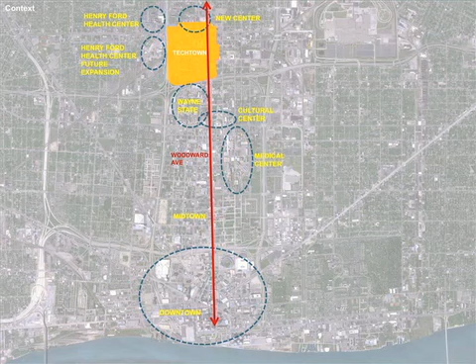So you have a number of buildings—some of the big car companies actually began in some of these buildings. Tech One is a famous building by Albert Kahn. You have various companies now in these buildings, energy companies, technology companies, but everything is very inward focused.

We were asked to develop an idea for the neighborhood that would lead to a master plan. Our idea was actually not to do a master plan, but to develop a strategy and a series of catalytic projects—to draw out of these buildings and out of these inward-focused environments places where people could meet and engage with each other and become aware of what each other were doing.

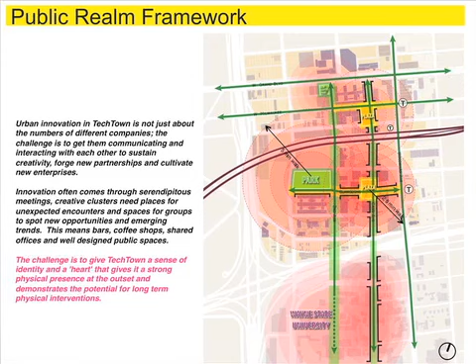We looked at the connections, the surrounding uses and some of the sites, and developed a series of public spaces that could become an organizing idea for this district—how to draw people out of the buildings and get them to engage with each other and meet, what we call promoting creative collisions, allowing for the unexpected and the spontaneous.

So we looked at a couple of key buildings and parking lots and developed a strategy to draw these buildings into these spaces and to create a very dynamic environment very quickly and cheaply.

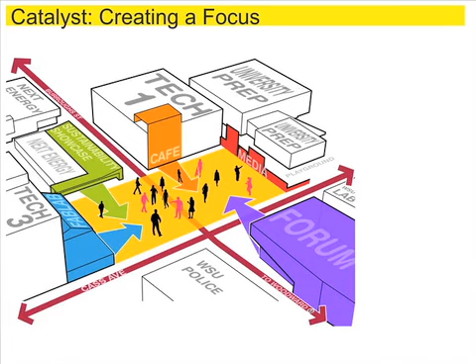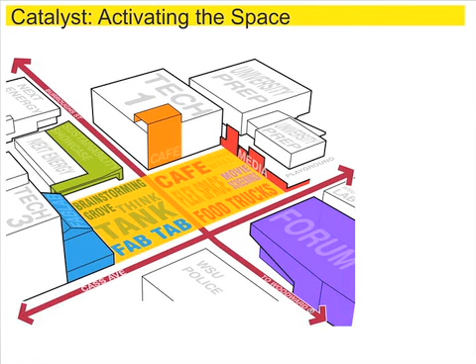I'll describe some of the uses in a moment. But as we developed the idea, the idea was to create a place that would allow people to come across it, to engage with it, to bring what they're doing in their various companies to the space. And we gave it a very strong identity that would be visible throughout the district.

This allowed for an evolution of uses that can happen over time, over different times of day and different events as they're programmed. We described a scenario of different people through the district and how they would experience the place. The idea is that students, company people, people in the medical industry, people in very small startups would all have a place to go.

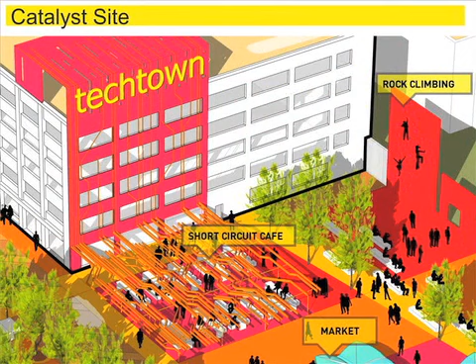Using paint and temporary pavilions and shade structures, begin to draw out people from their buildings. Established a cafe, a climbing wall next to a school. It becomes a meeting place where you can actually work and just stop by for a drink.

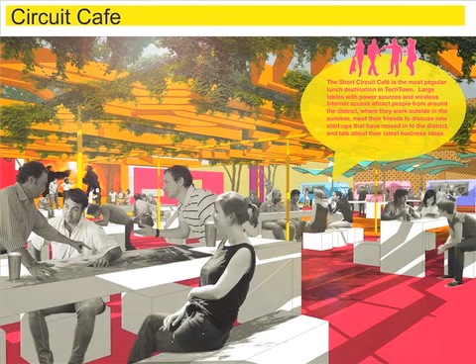Found local companies that have food trucks and set up a place where they could come on weekends and different times of the day to set up temporary restaurants, different kinds of meeting spaces, and what we called a fab lab, a fabrication lab, where high technology equipment would be available and then might extend out into the space where people would assemble prototypes and models and share the technology.

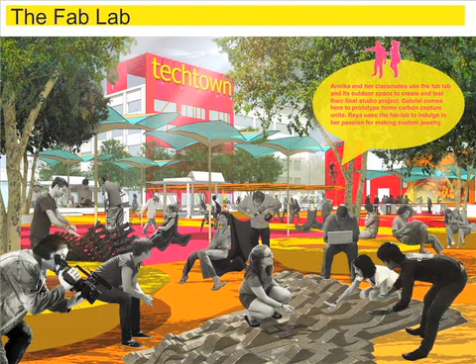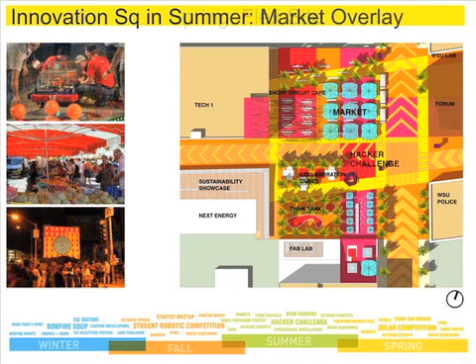Looked at different times of the year. In springtime, maybe a solar competition, the summer market times, winter skating, bonfires. It became really about the 24/7 environment, not just a place of work, but a place where people could live and do things that are between their world of research. Livability, the idea of social sustainability, was a critical idea.

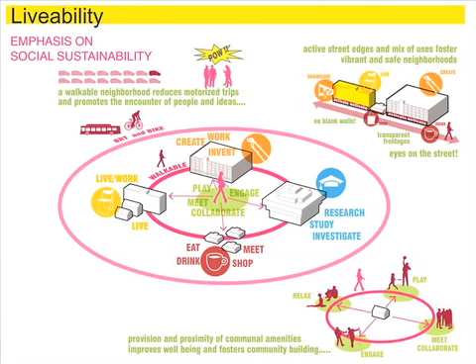As well as the use of technology, we thought of the district as a digital mirror. How could you get information? How could you find out what was happening in the area? How could you find out how much energy was being consumed or produced? Many different aspects of the district could be made available through this kind of technology.

So we're actually just getting started on that project, the real project now, working with a client, just having a kickoff meeting in November.

The exact opposite, I guess, of that is this place, which is the Dead Sea in Jordan. We were invited by an agency of the government to develop a strategic plan for the Jordanian side of the Dead Sea. Immensely complicated place for us. We'd never been there before. The Dead Sea—everything you know about water and aquatic life and ecology—at the Dead Sea, it's the exact opposite.

There is no life, there's no relationship between the land and the water. There's no exchange. The water is very dense, and in fact, you float on it. You can't even stand in it, it's so salty. And it's a place of mind-boggling history, recorded history, of all these different kinds of people that have lived here.

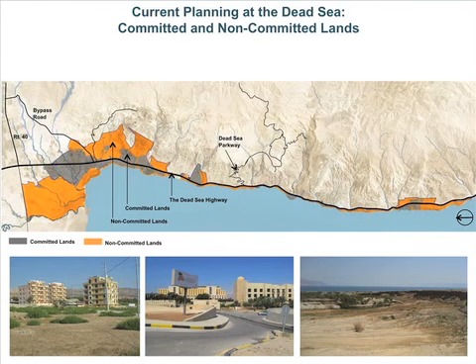A number of years ago, after being alarmed at all the land that was sold off, they decided to put a huge area of the escarpment and the hills into a natural reserve, but all that was left of the edge of the Dead Sea were these tiny little fragments of public land. And Sweimeh completely turned its back to the sea.

So you had no sense of relationship to the sea. And that red line that comes along the edge is a highway built by the Japanese government as a gift, and that is the sort of connector that ties it all together.

So we spent a lot of time mapping the area, understanding it, talking to locals, meeting with villagers, meeting with government officials, and began to develop a strategy of how to think about a balanced approach to development, one that really began to establish a public realm.

We began by analyzing the place, looking at its natural features, the wadis, or the whole drainage pattern, which became a major driver of our ideas. Looking at...

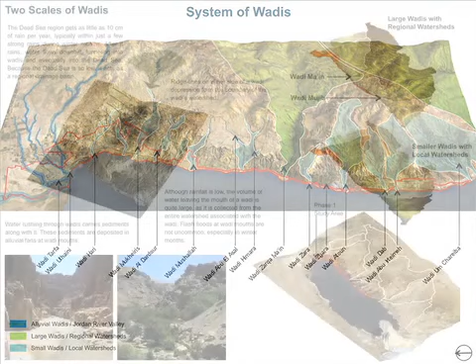these patterns which can be very exotic and dramatic, but also very dangerous when storms come, or flows can really tear down a concrete building. So you have to be careful.

Here you see one of the most dramatic ones, carved out over centuries by the flow of water. The wadis move around. In fact, that line on the left is the path of the Jordan River just over about 50 years. It's changed dramatically.

So there was a big argument with the client to set back development from this. The client is very eager to sell land, make money for the government. It's not a rich country, they have no oil, no real resources, and so tourism and development is very important.

But we convinced them to use the wadis as a resource and to work with them as a place that contributes to the natural wonder.

The sea is actually dropping about 1 meter a year. The Jordan River is completely dried up, and there's a plan actually to build a canal from the Red Sea to help replenish this. It's obviously a very complicated project, but we had to work with a coastline that would be evolving over time.

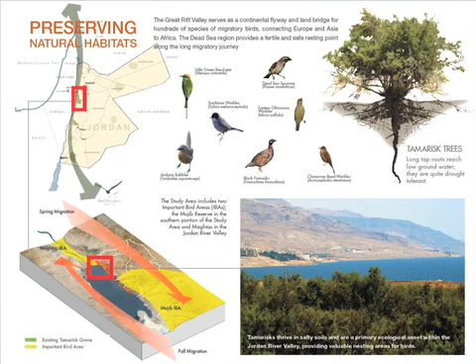Part of our work was to look at the natural habitats and understand the place. So a key aspect of the work was the economics and the financial aspect.

They were going to use the land and evolution and development of the Dead Sea area to improve the infrastructure for the community and the nation.

So how do you take these separate resorts, which are all operating independently? People come there, they stay for 3 days, and they leave and do nothing else. How can you think of them as value chains that add up to something more?

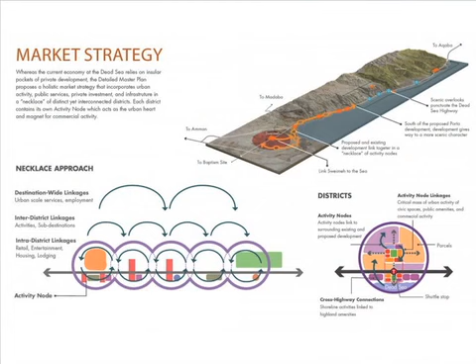Our idea was to develop a series of nodes and focal points that would be mixed use and completely open, so that people who lived there, who were just visiting or came to a resort, would have many different things to do. We used this strategy to engage with the sea itself.

So connecting the city, the town of Sweimeh, back to the sea, back to a public realm, and developing in a very strategic way relationships to the water, the hills, and the movement system.

A very interesting aspect at the northern edge was the tamarisk, which is a very interesting part of the ecology of the region and the bird flyway. There was a lot of temptation by the client to just wipe this out and develop the land, but it's really the best part of the area.

We convinced them to save it and to develop really an ecological park with a number of public beaches at the edge, and to create a whole new front to Sweimeh, this Corniche area I'll show you, and between it all flow the wadis from the hills to the water.

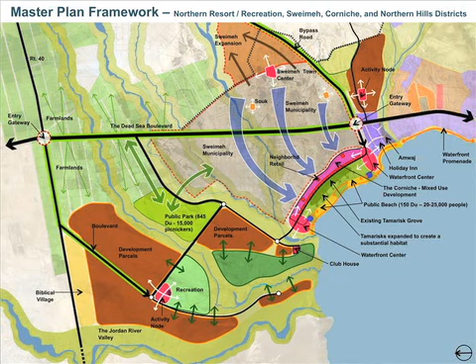And so Sweimeh finally has a face on the sea, and we could develop a series of public realms that would be fronted onto by a much smaller and fine-grained pattern of development, so that the development at the Dead Sea wouldn't just be these mega resorts by international companies like Hyatt, but would actually be small investors who would develop this over time.

And we then connected that back into the town, made every connection we could, and I'll talk a bit about the town in a moment.

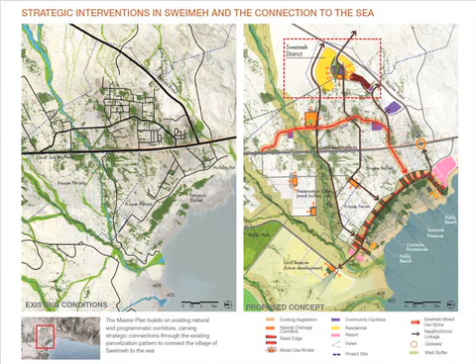So here was the new Corniche with the pattern of development. It's just one scenario of many small hotels, retail, commercial, and these nodes, these mixed-use nodes at either end. What the edge might be and some of the ecological strategies in terms of the building orientation and movement.

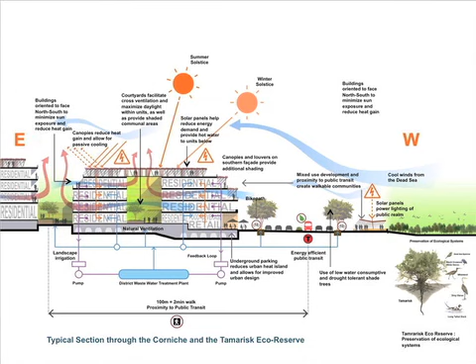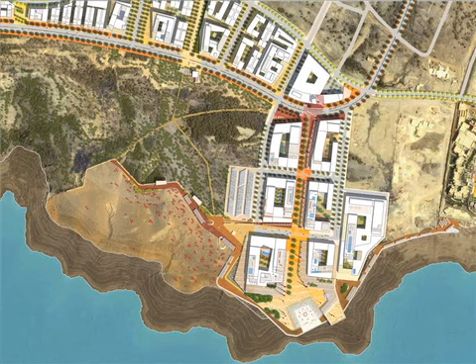So this is how Sweimeh might ultimately relate to the sea. You have the Tamarisk ecological zone, and you have this great Corniche of small-scale buildings, mixed-use, cafes, restaurants, hotels, residential, anything that could be developed here, all overlooking the area. And then a series of more intense development at these very strategic places where the visitor center is set up at the end of the street, and that's the blue dot.

And from that, you get an amazing orientation of the whole district in relation to the sunset, and an utter transformation from these privatized worlds to this new public realm.

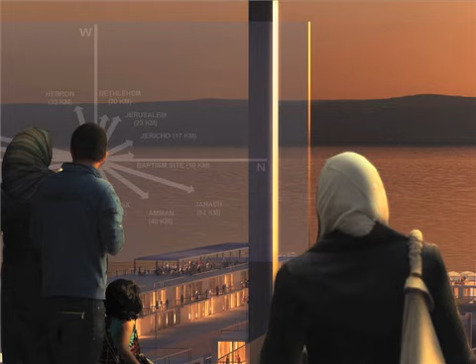And you recognize these places that are just a few kilometers away. Jerusalem, just 20 kilometers. And when we were doing this, Jericho had its 5,000th anniversary as a city. So we were thinking, well, Boston's what, about 300?

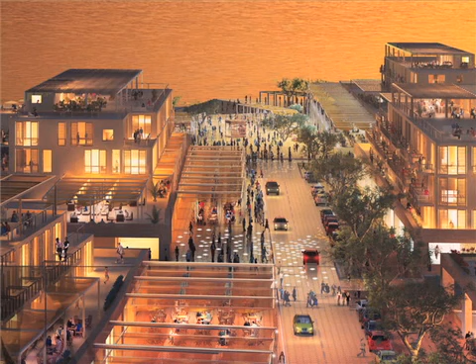And so we developed a series of guidelines and controls that would help this much more dynamic urbanism to evolve. And then when you pull back, you see that new face to the sea for Sweimeh, with the resorts evolving in the distance.

Sweimeh itself was very, very difficult to work in, because the government controlled almost no land. And furthermore, they'd made a huge mistake in selling land in wadis to naive owners who thought they could build houses there, which you really can't—it's very dangerous. So part of this was actually a strategy for land swaps.

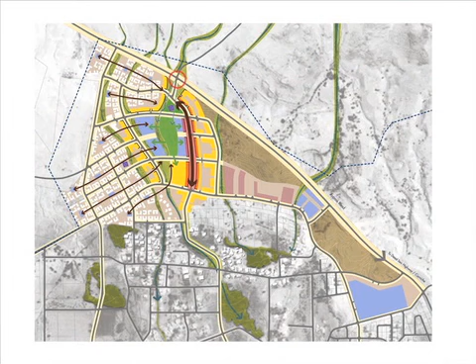But there was one place in that yellow area up on the top left, where at a major entry to the town, we could make a whole new settlement in response to the lack of community facilities, affordable housing, and public space. So we preserved these small wadis, integrated them into the new district, connected up every street we could, and made a new entry to the town in this area.

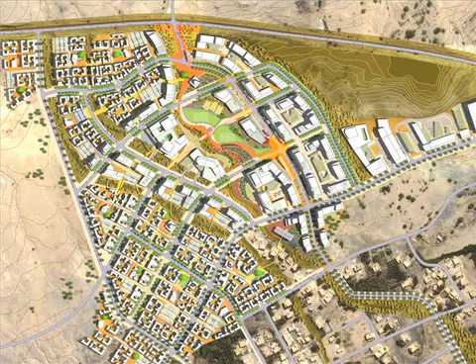We looked at different building types for family clusters, mosques, small schools, and other kinds of facilities, as well as a new main street commercial spine, which would ultimately lead to the Corniche and the Dead Sea itself.

And so this became the new entry area to Sweimeh, with a community park and the main street, with the schools facing onto those areas.

And a key strategy had to do with how we were dealing with water and sewage treatment. Part of selling the land for development allowed the government to build a sewage treatment plant, which would allow reuse of water for irrigation, toilets, and things like that, so that the cesspool approach—which was poisoning the wells and the water table, causing a lot of flies in the area, and unhealthy environments—could be completely transformed. And this, in fact, is now happening in the implementation.

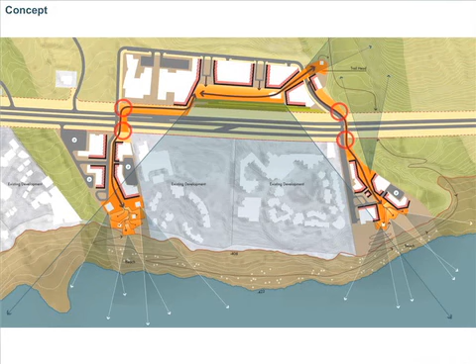You see a big hotel and conference center that's been built next to the sea. Our idea was to create this sort of mixed-use area up on the hill, and then to make these connections down the hillsides towards the water with a series of public realms and smaller development parcels that would strategically frame views and create a whole new kind of relationship to the water and the horizon.

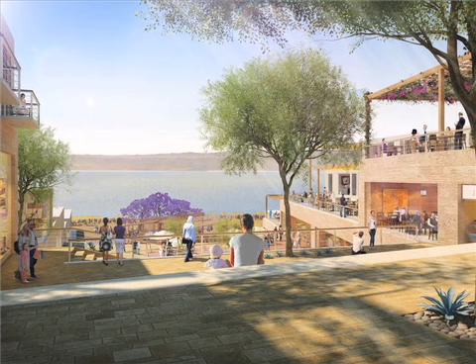So you can see us working with the wadis, protecting them, setting back. And so instead of this private world facing the sea, you had a whole new public realm.

This project is a competition we recently did, and it's the exact same size as the Dead Sea project, 40 square kilometers. Martin and a whole lot of people worked on that. This one, we had a lot of fun. It was a real experiment for us.

It's actually part of a previous competition that we won, for an area called the National Creative Cluster, which is a strategy by the government to advance creative industries in China. We were then asked by the local government to look at a site much bigger, and I'll talk about that. The site is in the eastern part of Beijing.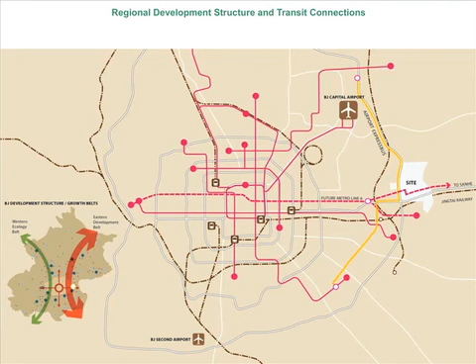It occupies quite a strategic location, the same size as Manhattan, which is very intimidating. It's on a major growth path of the city, where a significant transit line will be extended to the area. It sits in an agricultural zone, but it's rapidly developing with housing, towers, some really poorly planned environments, and the agriculture is slowly getting destroyed.

Here you see that pattern of development. One of the interesting things about this area is there's been a huge investment in art and artist communities, and that was actually a key triggering idea by the government to evolve this as a creative industries area. They were also very interested in agriculture and farming, how that could become part of the development.

They left it up to us to think of strategies to make proposals. Here you see some of the artist communities being developed, artist studios, galleries, incredible investment going on in Chinese culture and cultural development in this area.

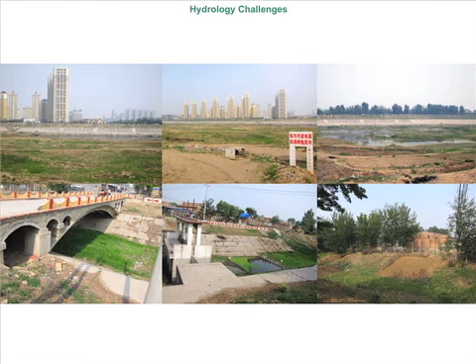Lots of water issues, landscape, ecology issues. There you see some of the development, not on our site but near it, extending out in a sort of tower sprawl. And you see the pattern of agriculture that is slowly being destroyed. Part of our challenge was how to address this and develop an urbanism that keeps things more in balance.

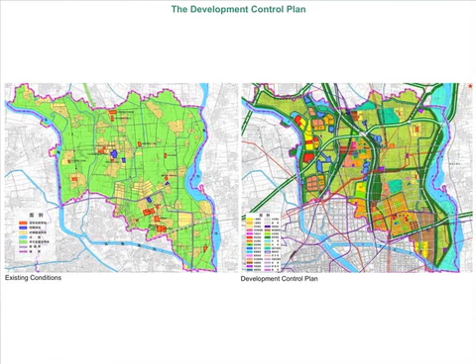There's a government control plan, there always is, and their idea was to consolidate development, but it's so huge, and ultimately we know it would just sprawl further into the landscape. We had to work with that, but we were free to make some significant changes in strategy.

So here you have the Chinese national strategy to move away from a purely production and factory economy to a creative economy, from made in China to designed in China. Sort of the opposite of the Apple philosophy, or to move away from that if they could. Part of our work was to invent program ideas for how this area could evolve.

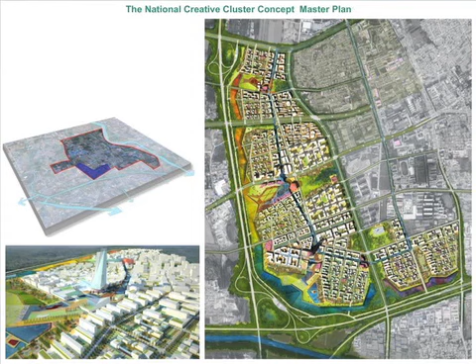This is part of that competition we won, just one corner of the site, but I'll look at the bigger picture instead. Our idea was to develop a framework that would allow agriculture and farming to coexist with urbanization, and to develop creative clusters as a series of settlements framing this farm landscape, working within a very complex and diverse ecological framework.

One of the things we had to do was keep the road pattern proposed by the government in their control plan, which was a huge frustration because many of the roads didn't exist yet but were committed and set. We also worked within the existing pattern of development, trying to integrate as much of what was there as possible, looking for a balanced approach of urbanization, agriculture and farming.

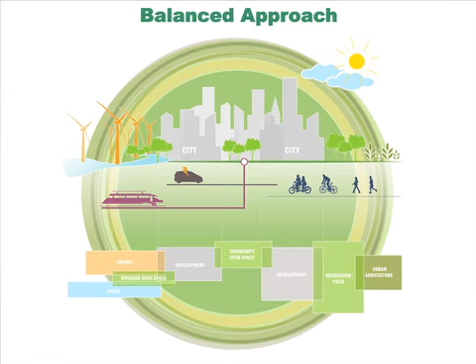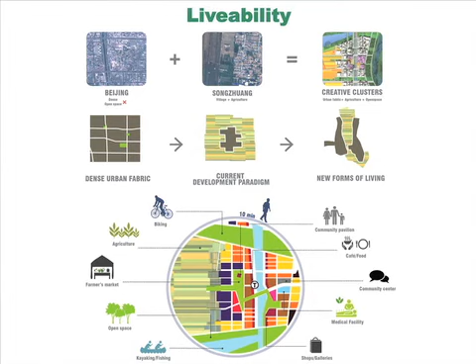Thinking about qualities of life, what makes a livable environment in Chinese culture, in evolving 21st century economies, looking at a diversity of development types, from existing villages to residential areas to creative industries, live-work, office, and all through a range of agricultural and farming communities.

The site hydrology was a key driver. It's an arid region, but there's a whole series of canals and waterways that we wanted to work with and had to work with in terms of the ecology of the district. Integrating the canals and understanding how stormwater management would work was a critical driver of the form of the major landscape systems of the area.

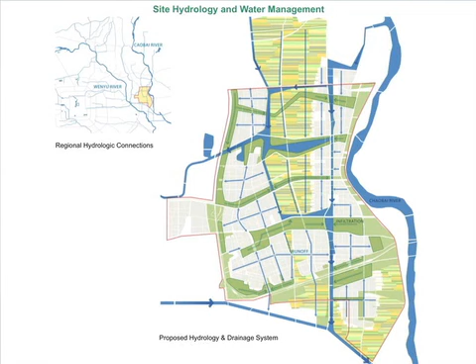So you can see how we started to entwine an agricultural pattern, a pattern of canals and waterways, and greenway systems, and existing highways—that's what's slicing through there—really working with the existing place and overlaying this whole big new idea for the urban development of the area.

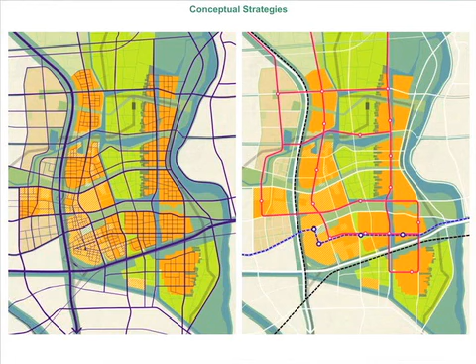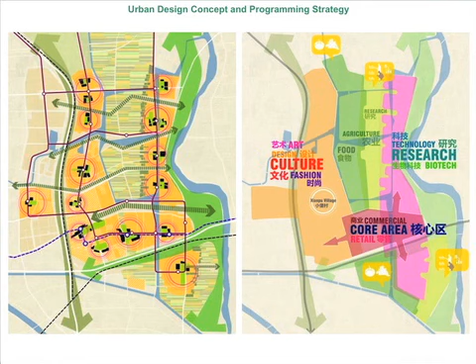The road pattern, extending and working with what exists, then creating new, more fine-grained patterns, connecting it up with transit, making a series of multiple centers and districts. We started thinking about program and the kinds of industries and places that might emerge in this district, from design to agricultural experiments, research, and alternative medicine, with the commercial core at the bottom of the U, where the major transit extension from the center of Beijing would occur. You see this mixed-up land use pattern of clusters emerging, and how the ultimate framework works.

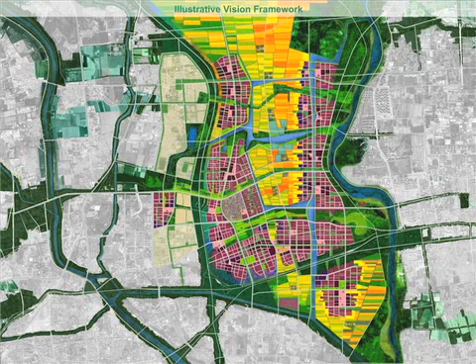One of the ideas that triggered some of this thinking was a lecture Richard Sennett gave at Harvard a few months before we started, where he spoke about borderlands and boundaries, how he liked the idea of a borderland where there's a lot of ambiguity—not one place or another with a fixed line. This idea of agriculture and urbanization being entwined with each other was inspired by that.

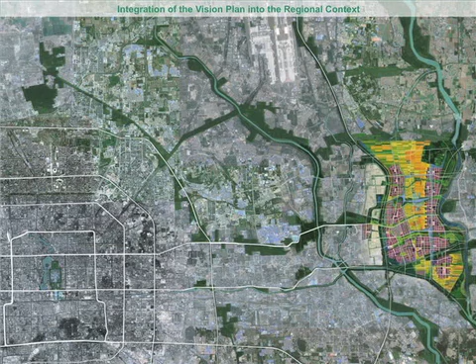So when you look at this, here it is in the context of Beijing, and that's the Forbidden City over there. There's our project, and there's the Olympic site we worked on a few years ago, which we thought was huge then—so this is just truly monumental. I don't think we've ever developed such a large area in our office at this scale.

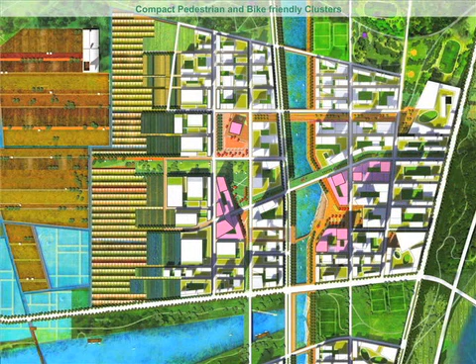Looking at the design principles of these mixed-use clusters and the integration with nature, the organization of urban form and diversity—how to think of this multi-centered, highly connected environment and how it relates to the farmland, which I'll talk about in a moment. We worked with the existing canal, making spines and public spaces served by transit, with social centers in pink—community facilities, schools, and public spaces—all embraced by these mixed-use clusters of development, which I'll show more in a moment.

So multiple systems working here: the urban districts, the greenways of recreation, sports and larger park systems, the agriculture, the canal system, all integrated to create this new urban pattern.

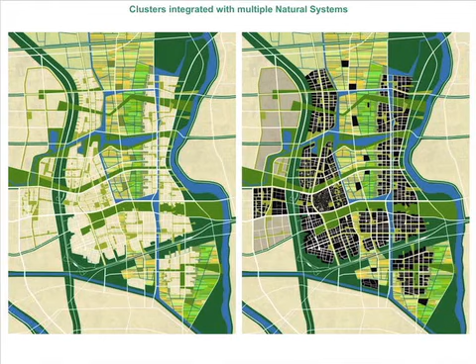The transit was critical to give people choice—whether you walk within your neighborhood, where you have all these different things going on, or ride your bike or take transit, as alternatives to cars.

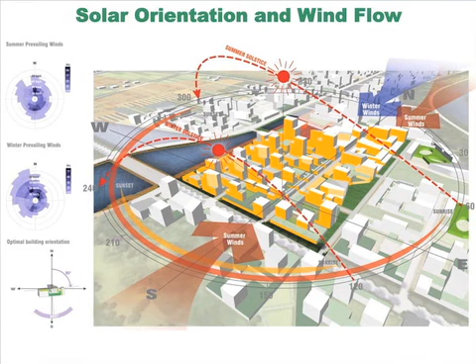So how do we program these places in a flexible way? It's really around the public realm and the big organizing ideas, looking at how you develop these blocks at the appropriate size and orientation. We looked at different building types, which grew out of Chinese village settlement patterns, and how to reinterpret those into 21st century mixed-use districts.

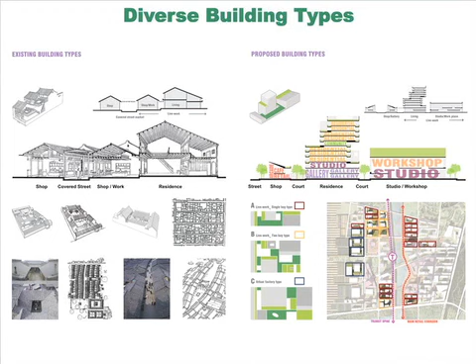How to think about agriculture, from the current scenario of farmland or importing products to consuming them—could you live in a more integrated setting where urban agriculture is part of the scenario?

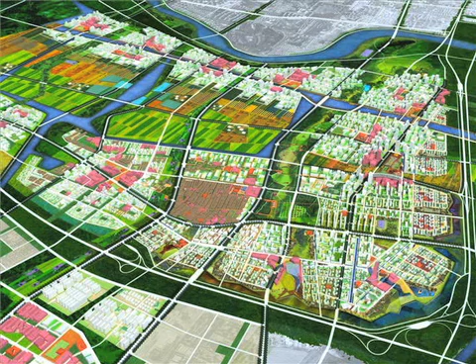The pattern evolved, and you see some of the major art community which exists in some of the villages that we incorporated into this larger pattern, all embraced and entwined in the agricultural production economy. We tried to think of different kinds of economic drivers within this agricultural industry, from production and local markets to culinary arts, to research and alternative medicine, and all sorts of experiments in agriculture practices. How could these evolve in this kind of borderland idea that is entwined with urban development?

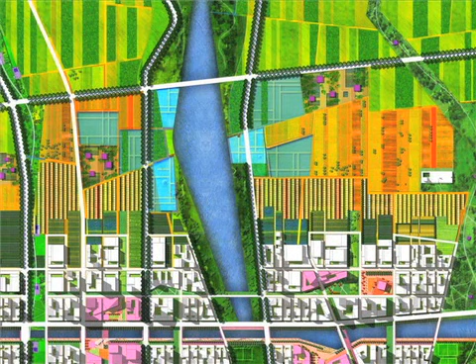So here you see scenarios of different patterns of agriculture as they relate to the urban areas—experiment zones—and working with our ecologists on whole ecosystems, moving from production to consumption to decomposition, in a kind of integrated circuit.

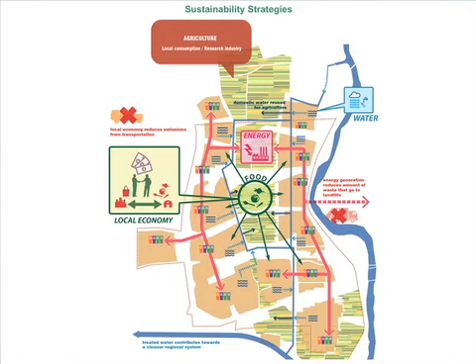And that is this sort of world of living with food production and living with energy production in an integrated way. So the overall plan connects to regional park systems, agriculture systems, with an intelligent network where you can find out what's going on wherever you are.

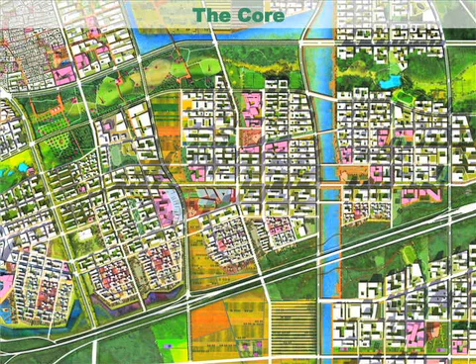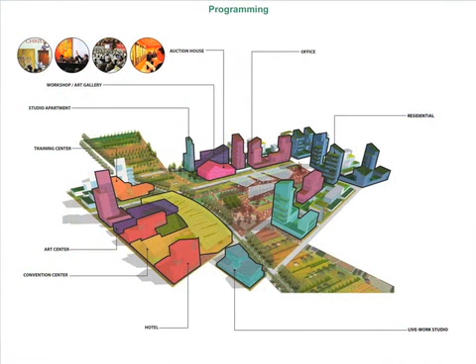Then looking at the core, which is the major transit hub of the area, there's a central auction house for the artist community, one of the few program requirements the client had for us. Major public spaces are part of the larger network, becoming display spaces for arts and cultural activity, programmed with different uses, framing major public event spaces that connect up the cultural and arts community with the agricultural community.

It's all part of the same system. The canal system acts as a central public space with transit and mixed uses. And then we have what we call the creative business neighborhoods or clusters, trying to invent prototypes for development.

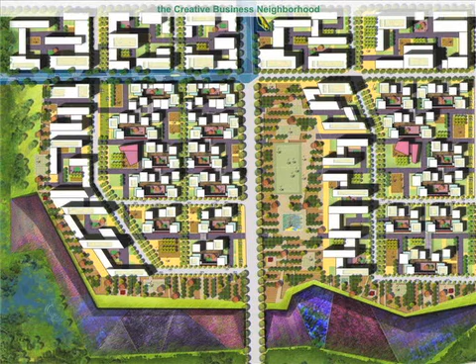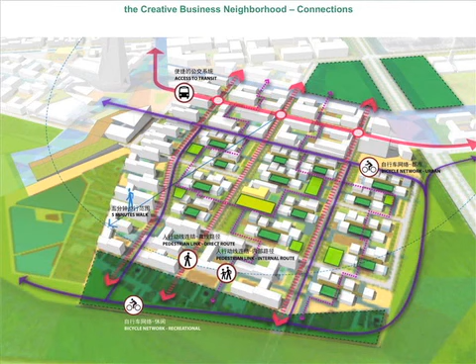These are built around courtyards, which is a key building type in China that is being lost. We're looking for ways to develop districts in terms of small components that build up into neighborhoods, connected with a whole array of community facilities, schools, and community infrastructure, focused around this prototypical mixed-use district idea.

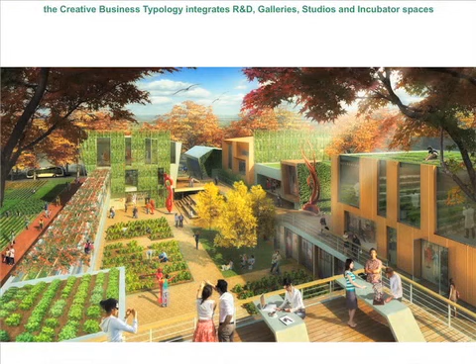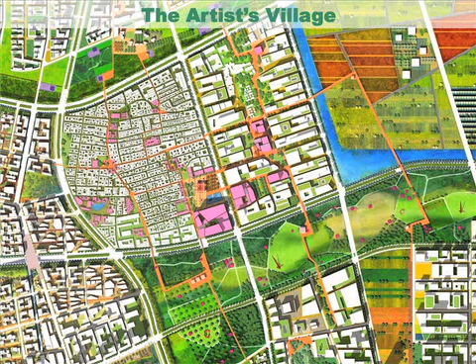Where people work, live, research, and have incubator businesses that can evolve over time. These areas are all around the major spines—that's what all these different scenarios show. Here you see how we connected the existing huge artist settlement that has evolved. This was part of the competition that we won before we started, and what we thought was a gigantic project turned out to be just one corner of an even larger project.

The program that evolved here measured almost 280 million square feet, to be developed over about 50 years. So the scale of these things is absolutely gigantic. It was a huge experiment, and we took lots of leaps. I've only shown you a small fragment of what we did there, but I think the teams had a lot of fun pushing the limits.

Talking of pushing the limits, another kind of project—a university project. This is at Masdar in Abu Dhabi, the Norman Foster project, another kind of experiment. He developed a plan for this new mixed-use research community in Abu Dhabi, and they've started to implement it. It's a fascinating idea, but it's rapidly evolving, and it has even changed since Foster's first buildings were built.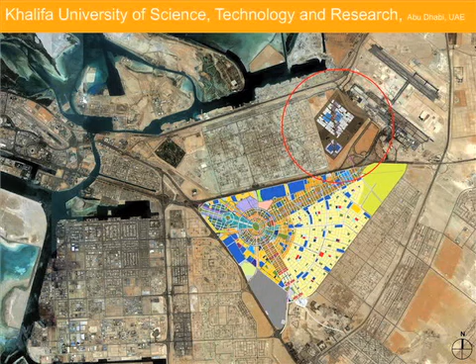This is his vision of a highly walkable, highly compact, very mixed and integrated area—a new city, transit served. There you see his first building, a very interesting and impressive complex of research facilities, living spaces, library, and community facilities that really works in terms of its response to climate and culture.

We were asked to look at about a third of Masdar for a new university, and I'll show you that in a moment. But Masdar is inspired by places like this in Yemen—these high-density, compact areas in an open setting that transform the environment, respond to heat and climatic conditions, with narrow shaded spaces, making it quite humane and possible for great urban life.

We looked at many inspirations for this, that even I don't think Foster had found, but they had done a very impressive amount of work on this. Here you see the area we were asked to look at—I think it's about 200 acres.

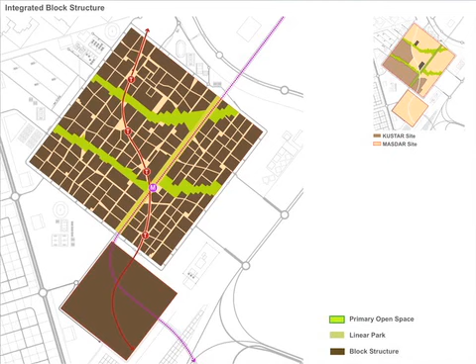This is one of many diagrams produced by the Foster office. You see this transit line connecting the development to the rest of the city, these greenways which are the cooling air paths as they flow through the city, and this very fine-grained network of streets and paths—not really for cars, very pedestrian-oriented. This is what was behind the whole Foster idea: a 35-foot-high elevated deck, which was the public realm of the new city, with all the infrastructure underneath, including moving pods, transit lines, and other services hidden away.

That all proved to be completely unfeasible. I think they eventually calculated it would cost about $25 billion just to create the ground plane on which you could then build the development. So very quickly after the first Foster building was completed, they decided to push everything back onto the ground, and that became a major challenge for us to deal with.

Our idea for the university was a very fine-grained pattern of development that would be completely integrated with the rest of Masdar, but would still retain some strong identity for itself as a research university—a science-oriented research university. Here you see the kind of land use pattern that we developed.

This orange building was Foster's first implemented building. This is the Masdar headquarters, which I think is finally under construction now. Our idea was to develop the university in relation to the greenways there as a major organizing idea, with a major entry coming from the edge or from many other points in the city.

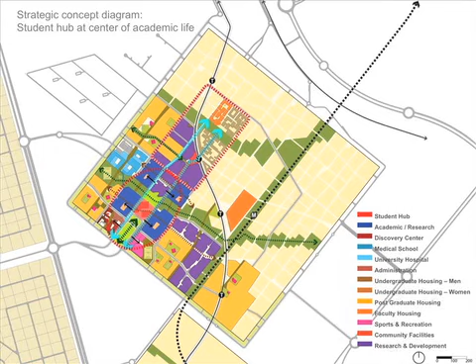And at the heart of the university and the academic core was what we called a student hub. We did not want an administration building as the dominant image or function of the university. We wanted students at the heart of the university. So a very compact academic core, with the student hub at its heart, and medical and research facilities in this area.

And then in purple were all these allied research facilities, very much like what you see at University Park or Kendall Square, except here completely entwined with the university and surrounded by residential areas. The university had a very high proportion of on-site residential.

This would be the first university that would be completely gender integrated in the UAE. And so you have a very mixed-use pattern of development that is then connected back into the rest of Masdar. We looked very carefully at the orientation of the buildings, how to create buildings that self-shade, that reduce energy consumption.

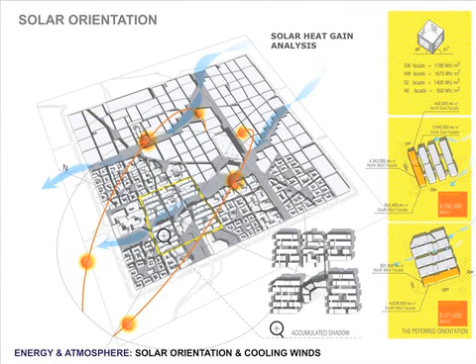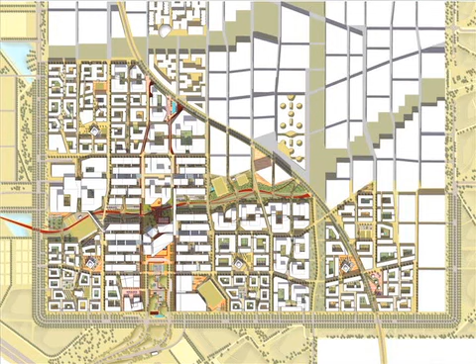And remain as cool as possible without all the air conditioning support that most buildings need. And here you see that pattern of development with this academic core, very flexible buildings. I'll show you in a moment.

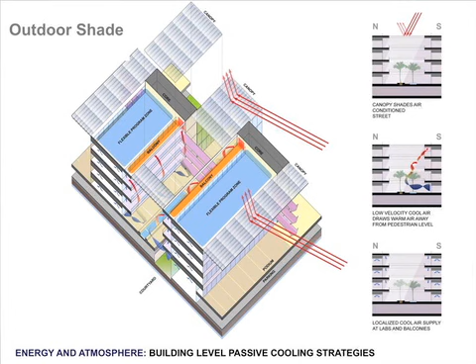Here is how we started to work out that academic core with these buildings of lab spaces, teaching spaces, very closely packed, allowing many flexible combinations of uses, with the student hub at the heart.

The greenway is used for all sorts of community facilities. And in the neighborhoods, you see the courtyard housing type of small apartments, the mosques, community centers, all within very close walking connection to the heart of the university, to the R&D, absolutely completely integrated. You would never need a car to move around.

Within the academic core, a whole network of courtyards, walkways, and connected-up buildings. In the hottest months, you could walk from one end of the complex through to the other without ever going outside if you wanted to.

And these are some of the courtyards in that system, looking at energy flows. We worked with Buro Happold on heat island analysis and shading, and then developed stormwater management and infrastructure through these greenways, which was most critical.

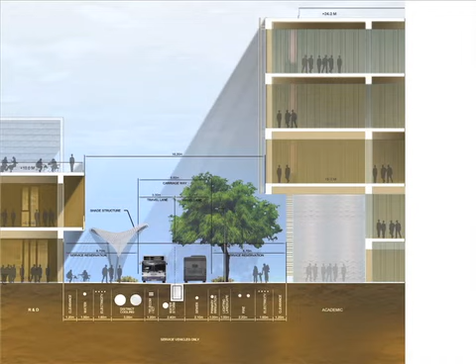And this was the fundamental change from the Foster plan, to get away from that podium, get everything on the ground, and integrate all the services in a simple way.

This is still quite revolutionary for Abu Dhabi, where the utility companies tend to separate all their worlds with big setbacks. Here, there's a lot of shared space, using the street in a very narrow way. This is actually the widest street in our whole development.

A whole network of pedestrian connections, bike connections, transit integration, all to make this new 21st century learning, living environment.

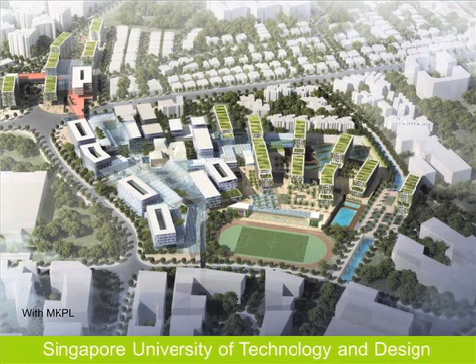Another new university, in Singapore this time. This was a collaboration with MIT, a very interesting idea the Singapore government had.

Singapore is very interested, obviously, in science and technology and all these 21st century economic drivers, but it's a country that is very concerned about the development of culture and arts and creative ideas. And they approached MIT to develop a new university that would combine technology and science with design, the design industries, and the business of design.

And so the site, here you see in orange, in a sort of complicated area near the airport, an exhibition center, and a business park being developed just south of the university.

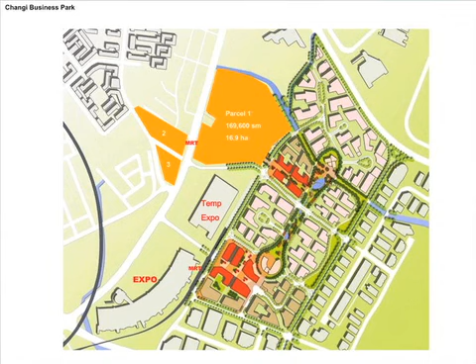And here you see a plan by the government for this new business park, which is actually well underway, with this parcel of land, which is about the size of the core area of MIT itself.

So we looked at this new paradigm of technology, design, engineering, and science, and tried to create a pattern of organization that could respond to this idea and organize the university in a way where there would be no disciplines. So there wouldn't be an architecture school or an engineering school, but there would be these zones of learning and community interaction for the university.

And we developed this idea of the spine, which obviously came out of the endless corridor at MIT. One of the interesting ideas of this university is that all the students would start first year together, whether you were in science or engineering disciplines. You would then move into your specializations, and then come back together again before you graduated, with all your experience in the university setting.

Also a high amount of housing on site.

So inspired by this corridor, which is obviously just more of a movement system than a real place to be, we preferred what you see in the Stata Center. We liked the idea of the exposure of the labs at MIT to visitors just passing by. And so we developed this idea of this great learning spine that would connect up the business park to a major new transit station, allow for these academic clusters to be framing this, and then in another spine, these kind of living learning zones coming off the heart of the university.

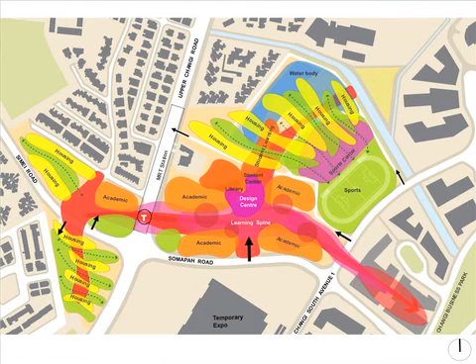And this would all be developed in a very tight pattern, again responsive to the Singapore climate of heat, humidity, incredible amounts of intense tropical rain, all within a 4-minute walk of the hub of the university. So extremely compact. This is about 8,500 students. Made a big roof over the spine and public spaces, and really mixed up all the program elements of the university.

So the spine sits right next to the main hub building, this kind of design center. Allowed for the air to flow between the big roof, which is just a screen.

And here you see the sports and recreation area with the housing, spine, entwined rainwater gardens managing the stormwater systems, and learning spaces all entwined on the lower levels of the housing.

This project is currently being implemented by UNStudio and another Singapore firm, I can't remember which one, based on our guidelines. For legal reasons, we weren't allowed to proceed with the implementation since we did the master plan according to the Singapore rules.